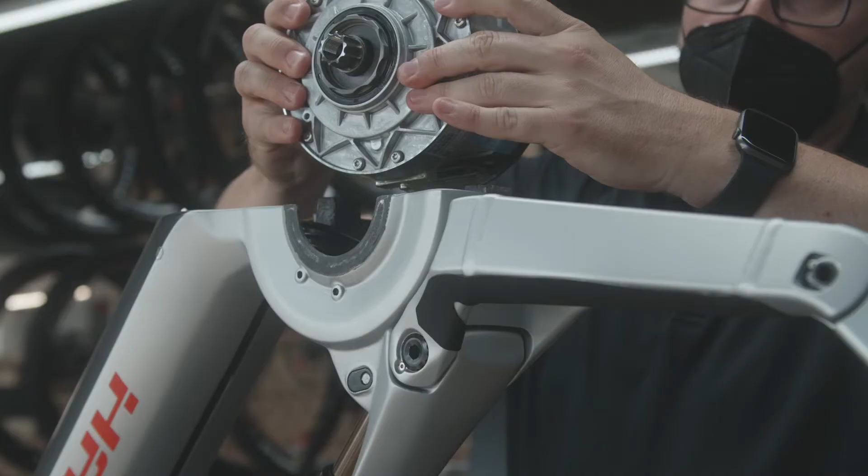Haibike, Winora, Ghost, Lapierre, and XLC. The Accell Group incorporates these and many other well-known brands. With around 3,100 employees and a turnover of over 1.3 billion euros, the group is thus one of the leading international players in the bicycle industry. In 2020, the Accell Group sold nearly 900,000 bicycles worldwide.

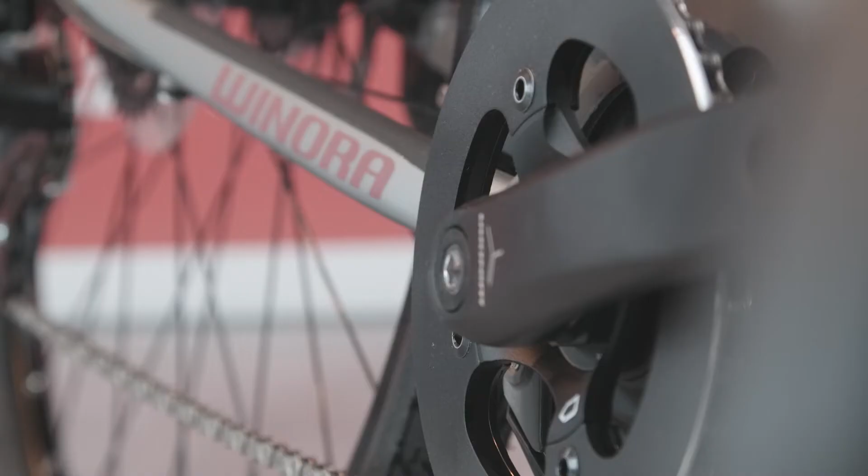In the development of e-bike frames and components, the developers rely on Ansys simulation software to make e-bikes even safer and more stable in the future. How did I get started? It's pretty easy to explain because my name is Lapierre and the name is on the bikes. So that means I've been involved from the beginning of the story, because this is a third generation celebrating the 75th anniversary this year. So which means I've been in the bike business from the beginning, so to say.

We wanted to strengthen ourselves in the development department with the goal of executing FEM simulations independently in the future. At first, we obtained an overview of the market and then selected the best product for us, which in our eyes was Ansys. With INNEO, we found a very good partner in terms of the implementation of the software and the overall service.

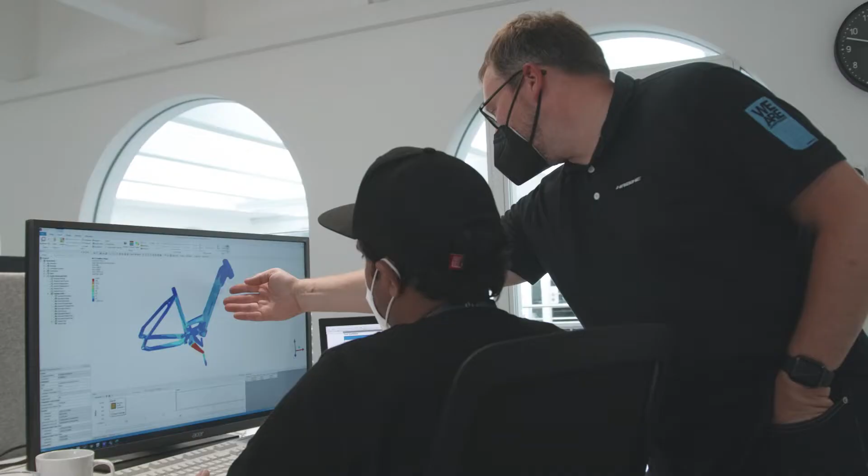There are big challenges in the bike area, and here it's primarily about the system weight of the bike. In the past, that was about 120–130 kilos. Today, it's 150 kilos. And when it comes to frame development, we must do our simulations at the beginning and throughout the entire development process to see whether our frames can really withstand that. We also simulate other components such as handlebars and seat posts.

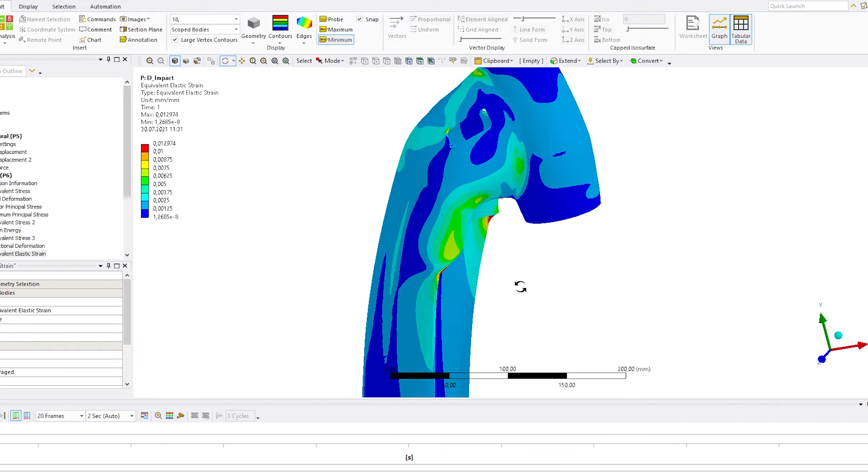Our development department consists of various disciplines. One is engineering, which is very important to us. We have other teams including industrial design, product management, and compliance. In general, there is only one claim for the Accell Group and for our products. We want to deliver innovations that represent the benchmark in the competition. We have already worked very successfully in this area in recent years, and naturally want to continue in the same way. Safety is paramount for us and our products. It is the highest priority from start to finish.

We now have new possibilities through Ansys. We can now calculate our frames in advance and design them in the same way that they also meet our test requirements. Another important point, the requirements we have internally are much higher than those required by law. With Ansys, we mainly do dynamic and static calculations for the stiffness of the frames.

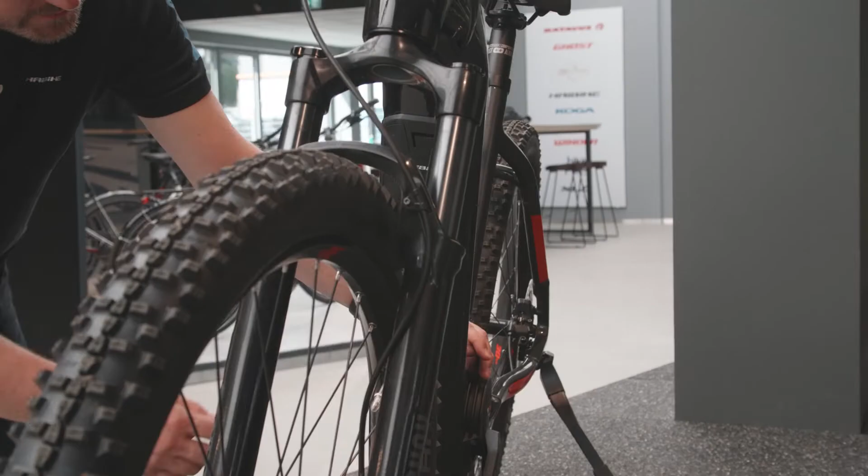A good e-bike today has different definitions. First of all, everything is related to, are we talking about e-performance bike? Are we talking about e-lifestyle? Lifestyle stands for trekking, commuting, and all the rest, by exception of performance, of course. For me, the ideal e-bike has to be light and has to be perfect in terms of power, so the perfect setting according to me is around 50 to 60 Newton meters.

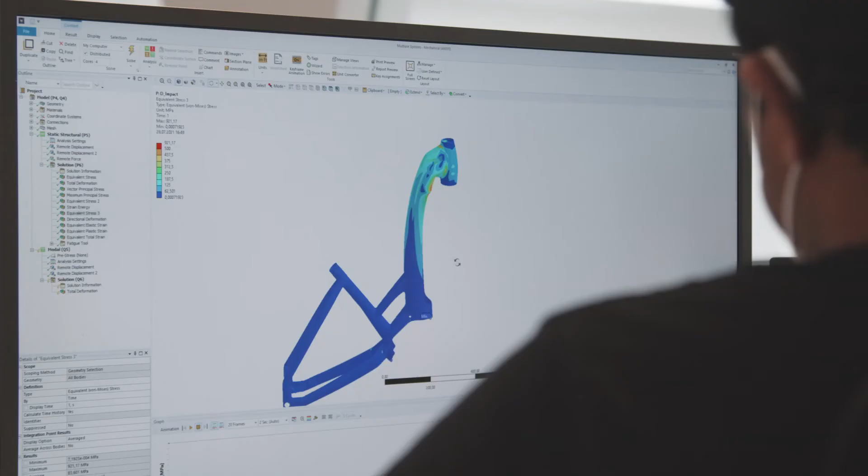We measure in advance how stable the frame is during riding and does it withstand our test requirements that we have for the frame. For example, do all the tests which are carried out afterwards in real life really pass? The advantages of the Ansys software are that we can carry out real simulation of the later tests that we carry out on the frames with a validated tool. This means that we can already see in the design and development process where there may be weak points, where we can make the frame more stable, so that later the safety for the customer is also given.

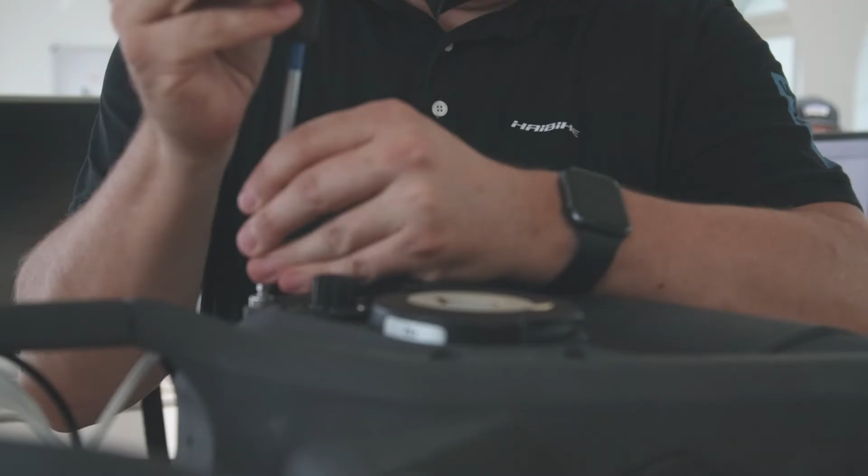Safety is always our #1 priority, especially in development. We strive to design frames that are safe for the end customer, even over the entire service life. With a monotube frame, for example, there's only one connection from the front wheel to rear wheel. And here we try to find out through very intensive simulation that this connection is stable in all riding situations and simply gives the customer a safe driving experience.

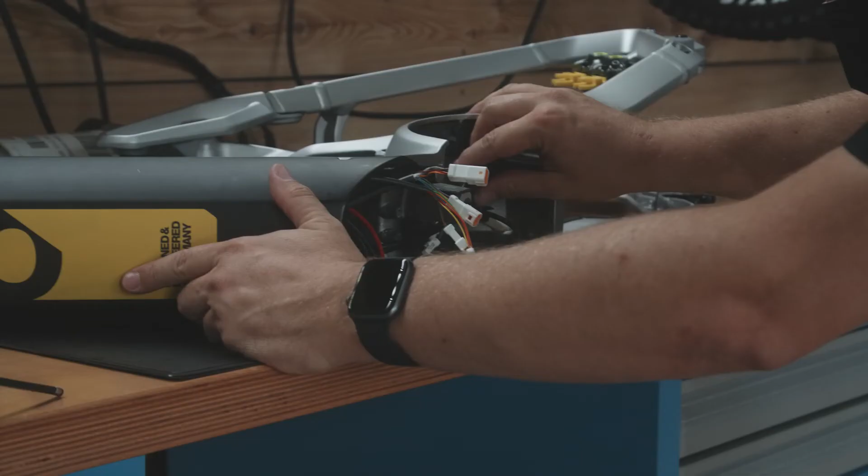The software saves us a lot of time. Where we would usually have a cycle of 2 to 3 months, we can now simulate this with the software within a few days and simply look at what we can improve on the product. The bike industry, and in particular the e-bike industry, is a very fast-moving industry. We're talking about product cycles of 2 and sometimes even just 1 year. And the Ansys software helps us to reduce this time so that we can bring our bikes to market faster without impacting the safety of our customers.